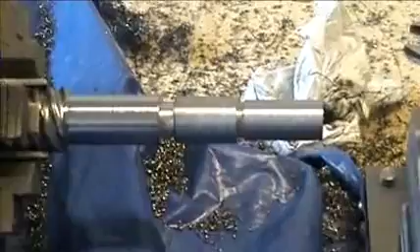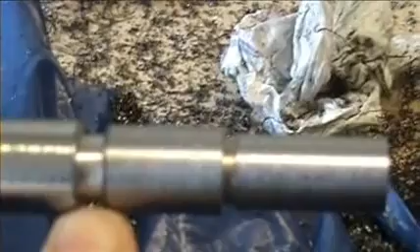This is going to be a video on how to set up thread cutting on a little mini lathe. Here I've actually prepared the diameter I'm going to screw cut. I've done a little undercut at the start, and it's very important you must do a good size undercut at the rear of it. This gives you enough time to stop the tool without hitting the next diameter.

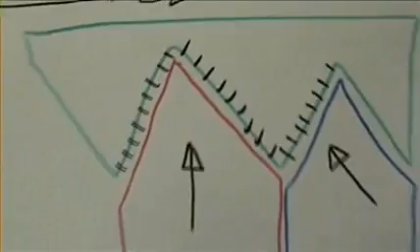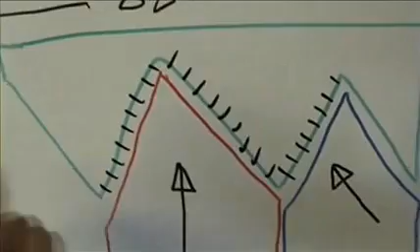There's a little explanation of cutting on the mini lathe. This is your actual screw. These are your lathe cutting tools, high speed cutting tools. If you move the cross slide in at 90 degrees, your cutting forces are on the whole tooth form. And the mini lathe hasn't got a lot of power. That's a lot of cutting edge to try and remove.

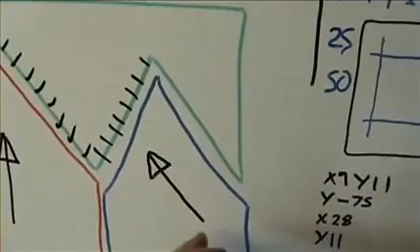So we move the carriage, which I'll show you later, 29 degrees, and most of the cutting force is just on this front face. Gives a lot better results and looks after your tool a lot better.

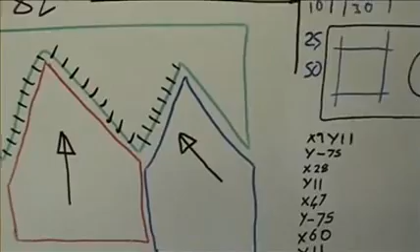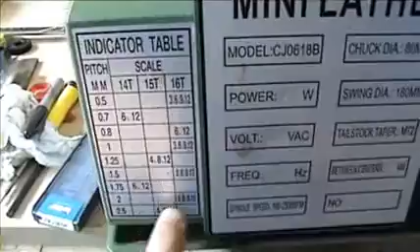So mine's set up for metric. I'm actually going to be cutting a 2mm pitch, and you can see over here these refer to the little indicator dial down here, and these 14, 15, 16, they refer to these little suckers, how many teeth are on the actual end. You can see on mine where I've got 2 millimeters, I can only use a 16 teeth gear, and that goes on and drives off your actual main lead screw. I've actually got a 16 in, so I don't need to change it.

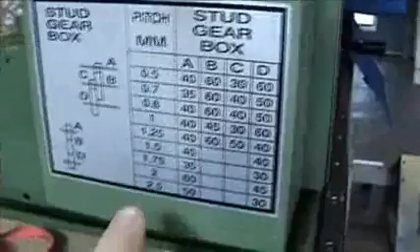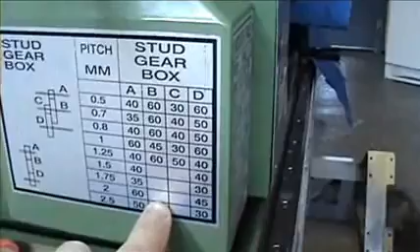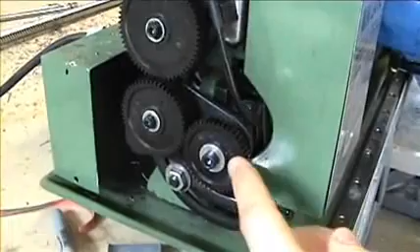Come around and you can see I've got a 2mm pitch here, so I need a 60 and a 45. It's blank. You can use any two of the same gears, doesn't matter. So the first thing I'll do is change the gears over. Okay, I've now changed the gears. I've got a 60 here and a 45 here, and I've got two 50s there. Just does fit nicely.

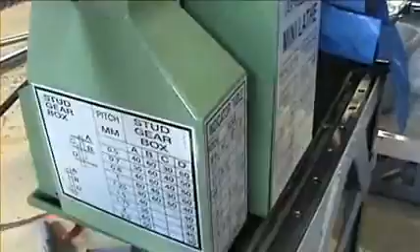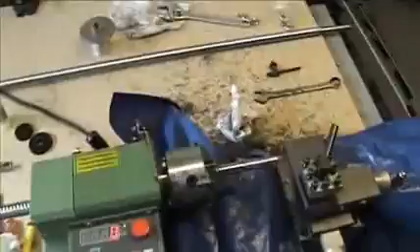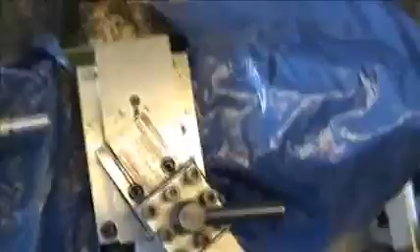I'll just show you the actual length of the job I'm doing. It's a large lead screw for the CNC machine I'm building. It is capable of doing, you know, that's a 2 meter length of rod. Next I'm going to move my carriage cross slide to the desired angle. Adjustments to the cross slide are just via them 2 screws there. Wind the sucker back in.

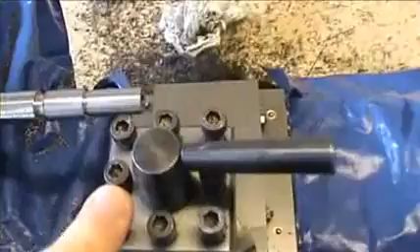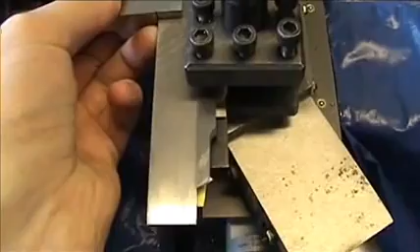I've now loaded the tool, carriage at 29 degrees, adjusted my tool. It's very important your tool is square in your tool post. I've ground my cutter so the side was actually square. I'll square it up just using a square.

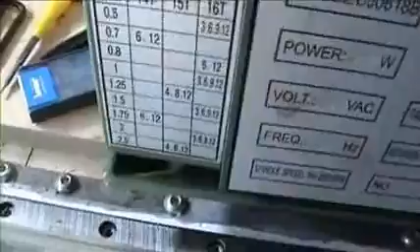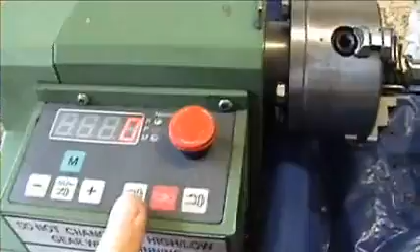Now the next thing is you're going to be cutting this at a slow speed, as fast as you're comfortable with, but it's going to be around 100, 150 probably is your maximum. You can see here on mine, for 2mm, I've got a choice of 3, 6 or 12. You've got to sort of pick one and stay with it, you can't mingle. I'm going to keep on 12 as my indicator.

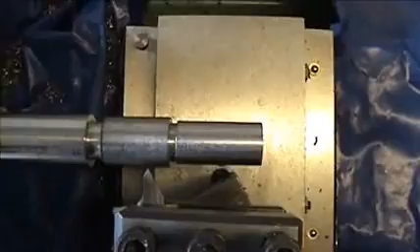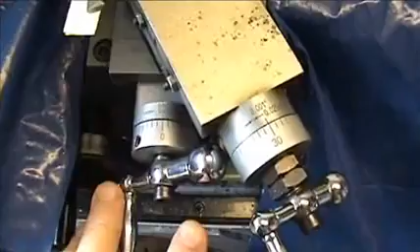So first thing I'm going to do, very important, I'll bring my tool roughly in to diameter, and I'll bring it to the nearest 0 on here. Some people, when they're threading, will actually remove this nut and remove the handle. Once you start the threading process, you only use this cross slide. If you use this, you would be shifting your thread pitch. You'd be misaligned. I always keep it on a 0, so if I do tweak it, I bring it back to the 0 and I'm not far off.

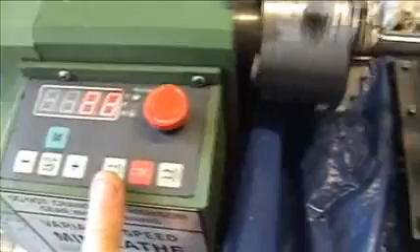And I'll just dial it in on this cross slide too. I'm just going to zero that. Okay, I'm going to attempt this holding the camera and doing this all together.